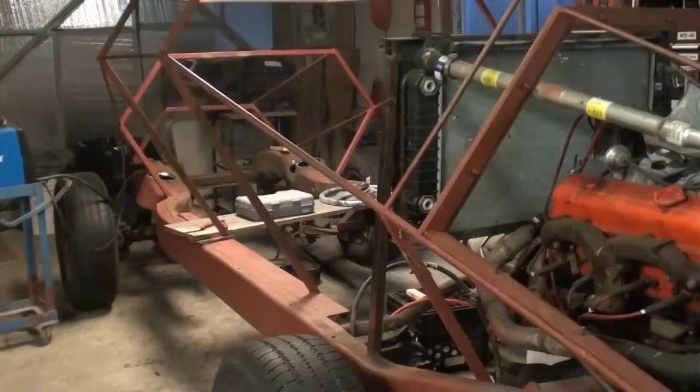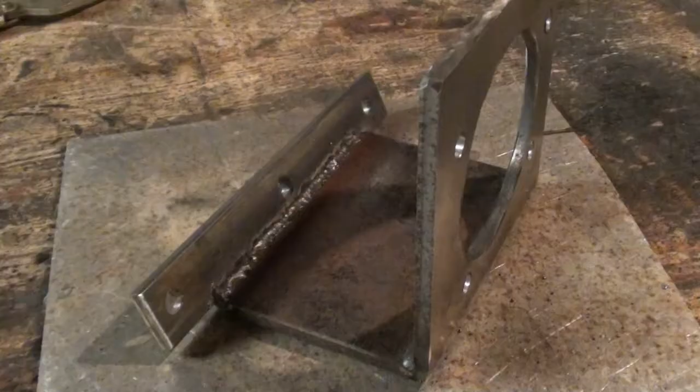Just back working on the 222 Scout Car project. Gonna work on this steering system, try to get some progress made on that. Here's the custom bracket that mounts the gearbox, the 90-degree gearbox that gets the steering wheel on the orientation that it needs to match the original.

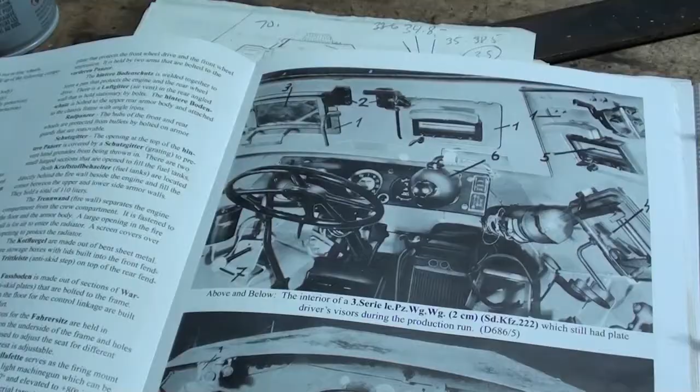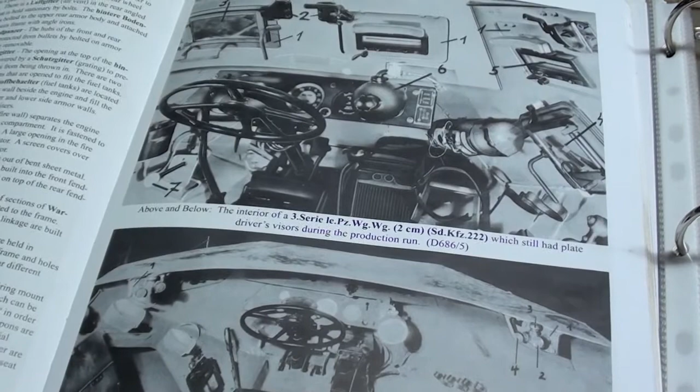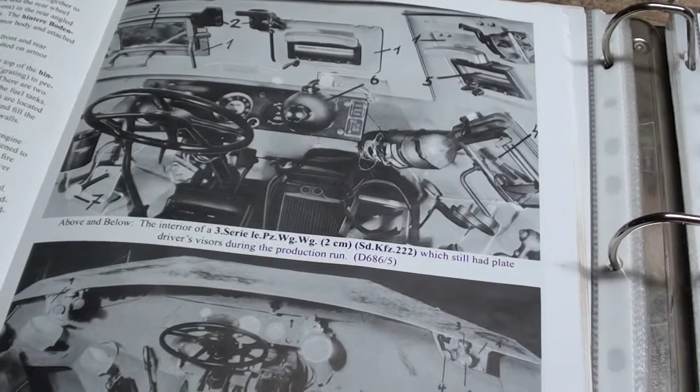So the best I can tell, the steering wheel is mounted a third over. I took one measurement from a photo and it looked like it was roughly 1/3 over. The vehicle isn't laid out like a regular car. There's not a passenger seat, so it's not really split down the middle, and the driver's stuff is on the left and the passenger is on the right.

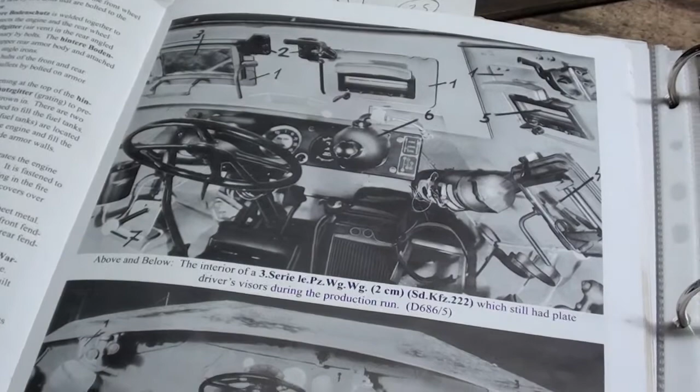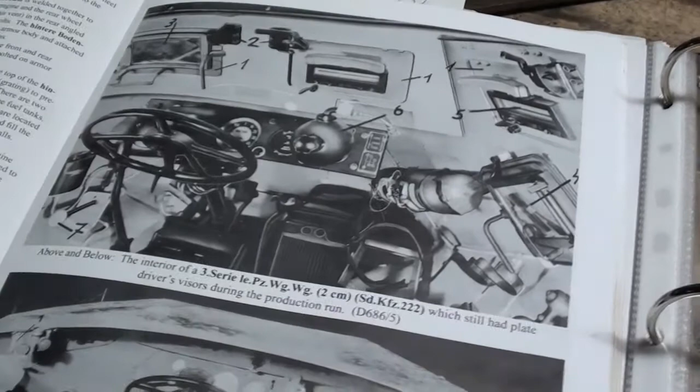But looking at all the different photos that I have, it's very difficult to get a sense of the actual angle of the steering wheel, because the photos are all taken from different angles. So we had to make a few compromises, I think, and more or less we just looked at the photos and eyeballed it.

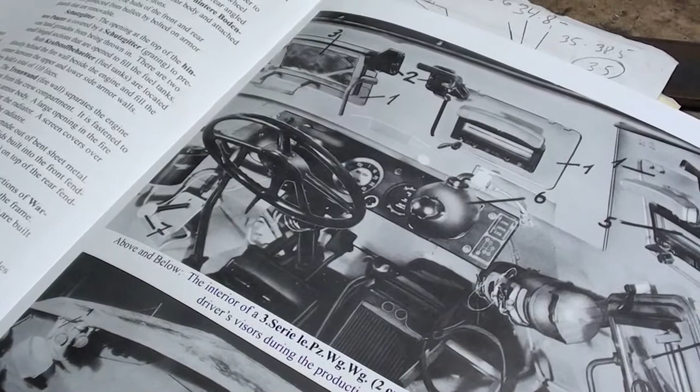There were also some considerations with the steering column and making sure that the linkage that goes from the gearbox to the steering box has clearance from the steering wheel itself. So I think we've got a pretty good representation of what it looks like, and it seems to be comfortable when you're sitting in the vehicle. So we're going to go with it.

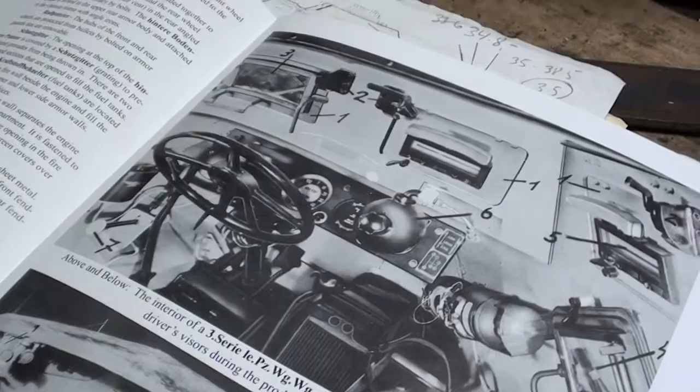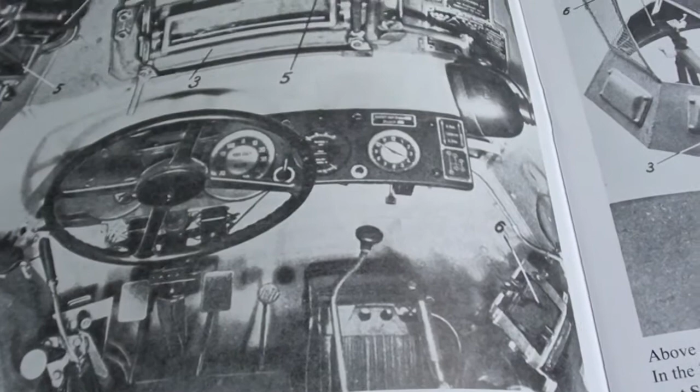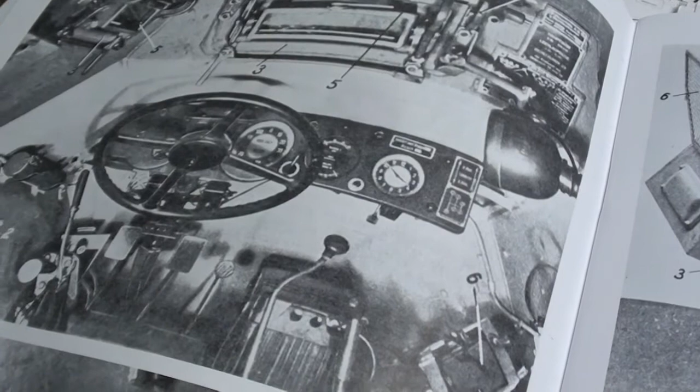It's almost as if you're looking at different photos and it's actually mounted differently. Obviously there were different versions, so that's also a possibility. So again, we're just trying to do the best with what we have. The gearbox that they use on the original was a lot more compact, and that's also something that we have to deal with. So again, like I said, just splitting the difference and eyeballing it is where we're at with the steering wheel position.

Okay, I've got a mounting plate welded to the framework, and that's going to be the basis for the way you bolt on the gearbox bracket. Again, I'm trying to design everything so it's removable and serviceable at some level. When it comes to making a vehicle like this, it's really easy to just start welding pieces onto stuff. But if you don't think about being able to disassemble it and repair it, replace parts down the road, you can run into some serious trouble.

Even thinking about clearances for nuts and bolts is something you do have to consider, because when the vehicle's in this state, you might have access to something, and then you put plates and sheathing and all that kind of stuff on it, and you're not going to have access and be able to actually remove that hardware.

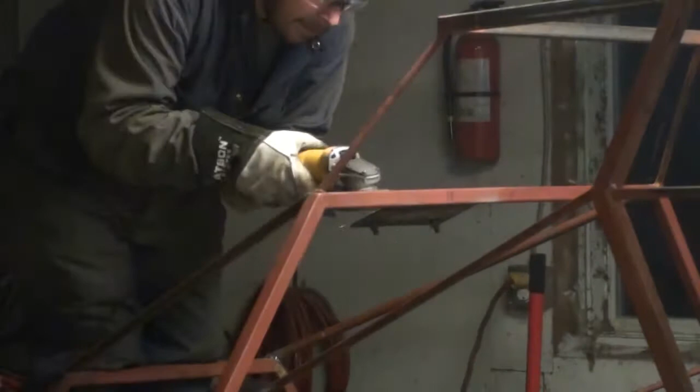Okay, there's the bracket all finished. The gearbox gets bolted into the bracket, and the bracket in turn gets bolted into the framework of the car. That's the mounting plate that the bracket gets bolted to. And now that this is done, we can move on and start working on the steering column that goes down to the steering box.

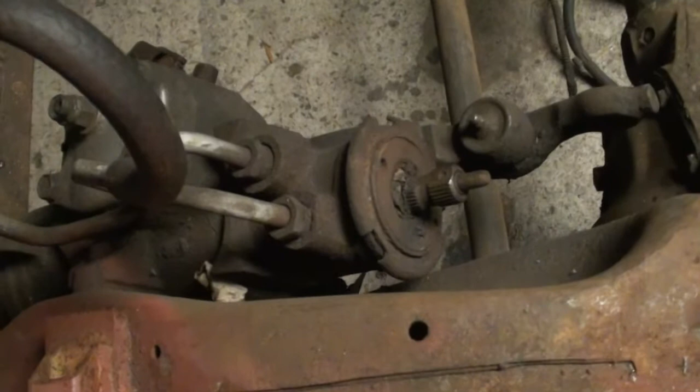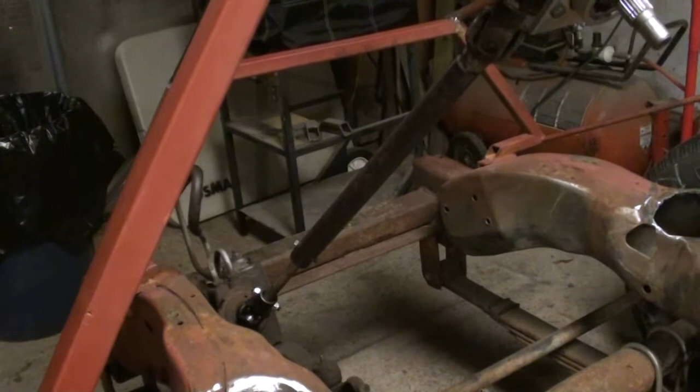Okay, so the gearbox is installed and the steering column is also set up. So we now have the steering column going down from the gearbox into the steering box, 2 U-joints and a shaft, and everything is set up and working. So all we need to do now is get a steering wheel and hook up the ball joints and the tie rod system at the bottom end, and this thing will steer.

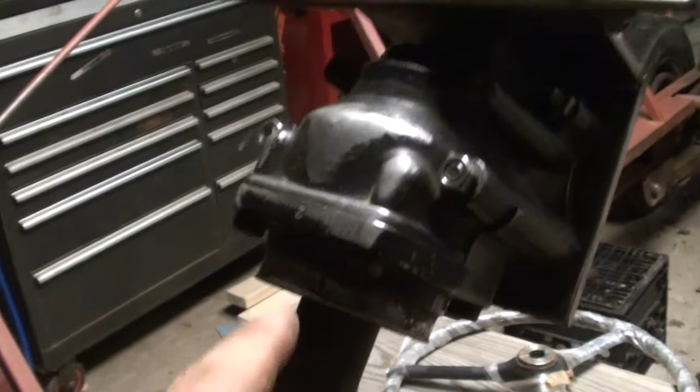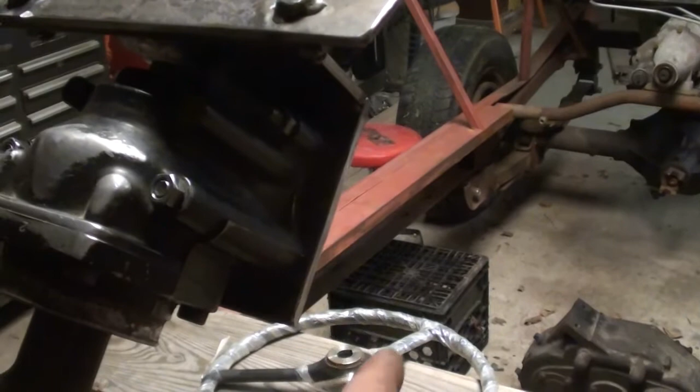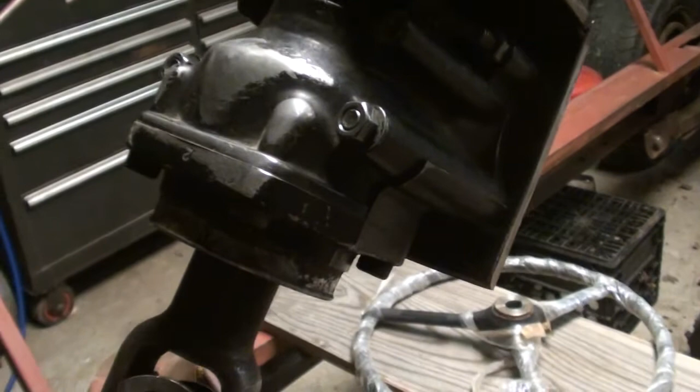I might reinforce the back end of this gearbox here. I'm thinking I can bolt on another set of brackets or maybe have something extend out. There's going to be a cross piece that goes across, which will provide a point for the dash panel to be bolted to, and it's going to run right over top of this. So I might add some more support in there, but as it stands I think it's pretty solid. There's just a little bit of flex, but I think it's going to work.

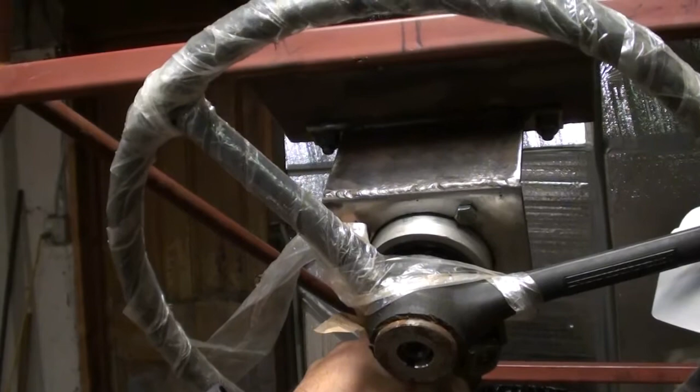Just hold the steering wheel there and you can get a sense of what's going on. I don't think this is the steering wheel we're going to use. I've got 2 options now. We're going to custom fabricate a steering wheel from scratch, or I'm going to order a tractor steering wheel and modify it.

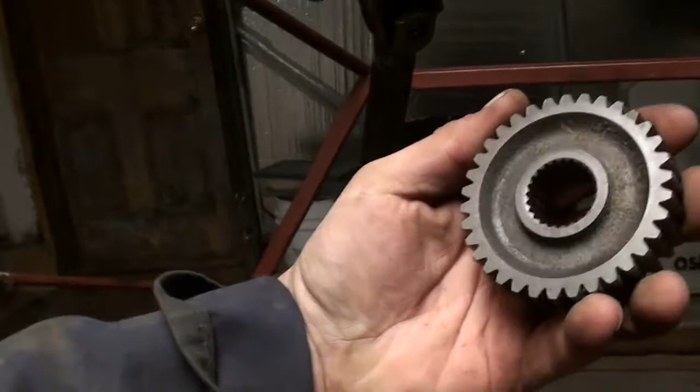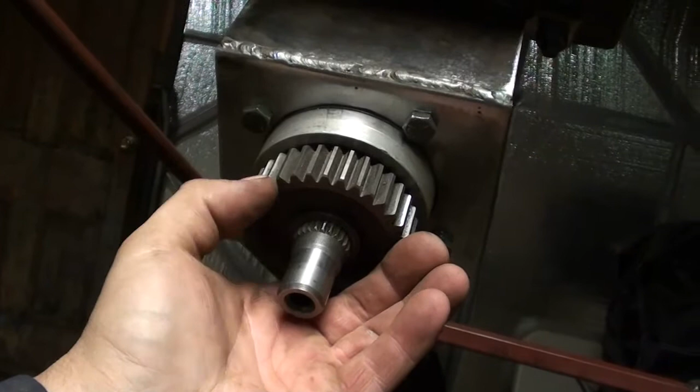I've got this gear here, the splined gear, and that actually fits on here. So the idea is either to adapt this splined gear to a steering wheel that we purchase, or we use this as the central hub to build a steering wheel from scratch. So those 2 options are on the table right now.